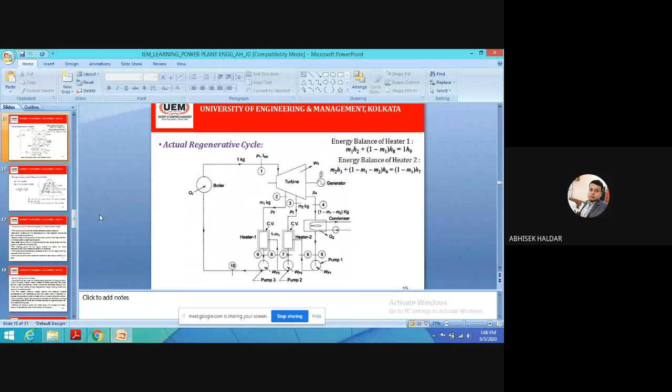There is in place. Okay, so now I will discuss the problems. Prior to that, let me go for it now.

So I will show you. So my slides is properly visible, right? My slide is properly visible, yes sir. Okay, so prior to discussing the problems, let us discuss two more new topics.

The properties of an ideal working fluid in a vapor power cycle. In a steam power plant, the ideal working fluid we use is water, that all of you know. But what should be the ideal properties? Because ideal, yes, it may not be achievable practically, but there are some properties which a fluid should have when it is thought of as the ideal fluid. So what are those properties that a fluid should have?

The first one, the fluid should have high critical temperature and pressure. So whatever fluid I'm using, if it is water or any other type of fluid, the fluid should have high critical temperature and pressure. Now that critical temperature and pressure means the topmost point or the top notch point of the vapor dome. You know what is the vapor dome. The top notch point is the critical point. So that critical point, the corresponding temperature and pressure should be high enough, so that the boiler pressure and the condenser pressure can be controlled.

Next is the saturation pressure at the temperature of heat rejection. The saturation pressure at the temperature of heat rejection should be above atmospheric pressure. Try to understand, saturation pressure at the temperature of heat rejection, that means heat rejection temperature is T2, and on which part does it happen? It happens at the condenser, because in the condenser we reject the heat.

So saturation pressure, because it is a phase change, as in the condenser we are having the phase change. What is happening there? Only the latent heat from the steam is given out, and that means that is the heat rejection. The latent heat rejection is basically happening over there.

So whatever condenser pressure we are talking about, that condenser pressure should be above atmospheric pressure. But I should mention that practically there are very few fluids where we can get the saturation pressure at the heat rejection which is above atmospheric pressure.

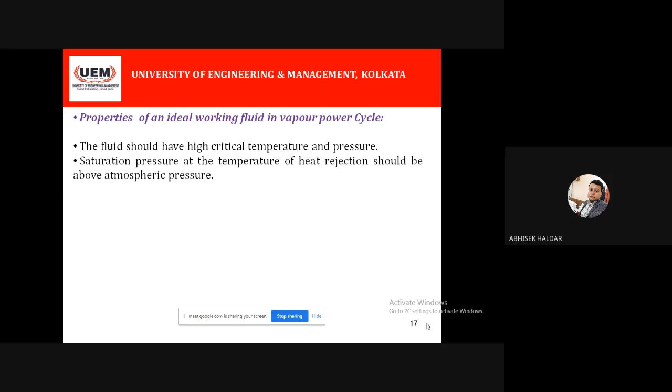Saturation pressure at the temperature of heat rejection, that is at the condenser, should be above atmospheric pressure. If it is so, we don't need to maintain that vacuum. But practically we have to maintain the vacuum as we are not having that type of fluid.

Next is the specific heat. Specific heat of the liquid should be small, so that little heat transfer will be required to reach boiling point. I'm discussing one by one points, otherwise it will be very difficult for me to understand where you are having the doubt. Is it clear? First two points are clear? Yes, sir.

The third one should be also clear. If you know what do you mean by specific heat, the third point should also be clear. Specific heat of the liquid should be small. That means what? Specific heat means the property by which it can retain the heat, any material which can retain the heat. So specific heat of the liquid should be small, so that little heat transfer will be required to reach the boiling point. Consider the case of boiler.

We are heating the water to make the steam. So if the specific heat of the liquid, that means the working fluid, is high, then what will happen? It will not take and will not reject heat much. Whatever heat it is having, that particular fluid will try to retain that heat. That means very less tendency of heat transfer will be there. Heat capacity and heat transfer are different things. We need high heat transfer capacity. So we should have a working fluid with low specific heat, to reach easily the boiling point, to generate the steam or vapor.

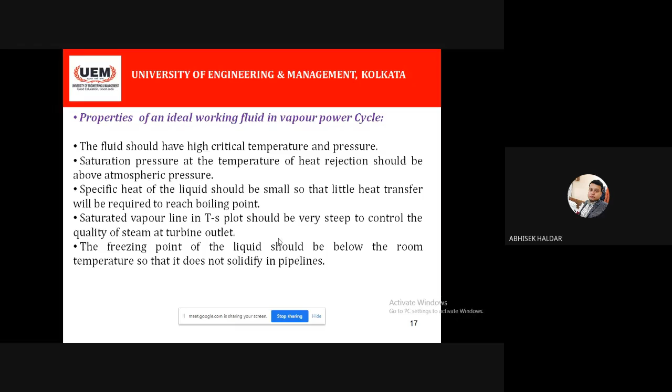So the freezing point of the liquid should be below room temperature, meaning the standard atmospheric temperature. It should be designed in such a fashion that it will not solidify, which happens when the freezing point is much below. So this point is important for cold weather countries. It may not be much applicable for India, but you should remember this point.

Next, the fluid should be chemically stable so that it will not react with the materials of construction, because that is very obvious.

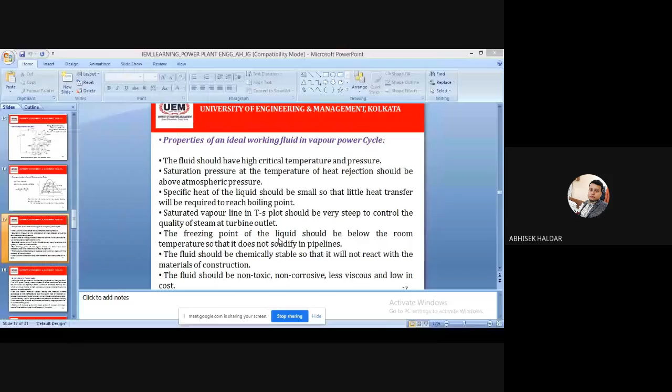Someone is entering now after 15 minutes of the class. Okay.

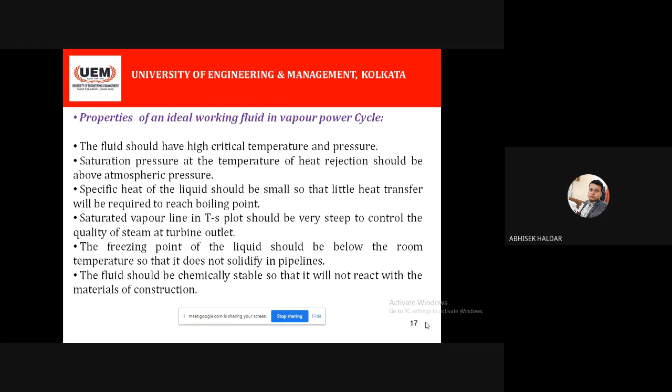So this point we are discussing, the fluid should be chemically stable. That means it should not react with any parts of the pipelines, valves, or whatever metallic parts we have in the construction. It should not react with that. Okay, that's it, that is the chemical stability that is required.

And the last one is the fluid should be non-toxic, non-corrosive, less viscous, and low in cost. Obviously, cost is an important parameter. You may attain these properties for a particular fluid, but if the cost is very high, then the production cost of electricity will be very high. You cannot sell that, right?

So that's why we usually use water, generally, yes. But actually water does not have all these properties, but water is nearly abundant from the point of view of availability, and it maintains some of the properties. Obviously it is not practically possible to get all these properties for a particular working fluid. By using a single fluid, practically it is not possible to attain all these points, but these are some ideal points.

But why do we use water? Water maintains most of these properties, and obviously it is free. We only have to treat our water a bit and we can directly use it. We need not buy the water in most cases, and that's why water is the most commonly used fluid in the thermal power plant.

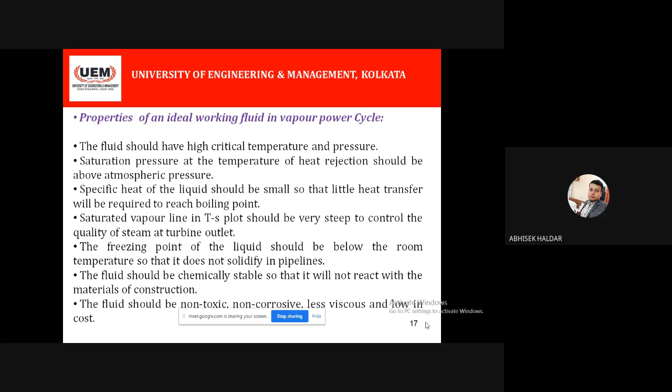Okay, fine. But as I told, no single fluid can maintain all these properties, or no single fluid is available to us to maintain all these properties. There is a need of binary vapor power cycle. Have you heard this term earlier? Binary vapor power cycle - how many of you heard?

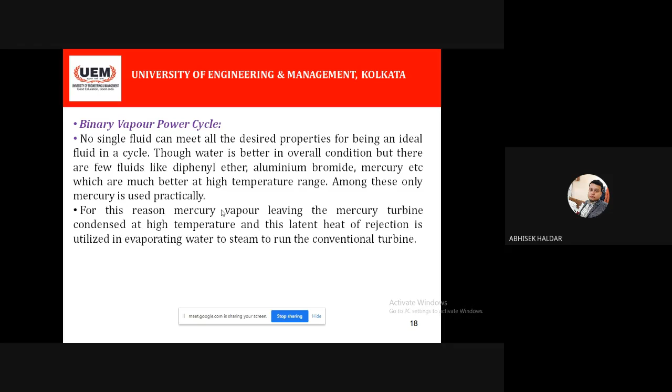So for this reason, mercury vapor leaves the mercury turbine. You may not understand this point first, but still read this second point, then I'm showing you that mercury's viscosity is very high.

I understand that, but I am not using mercury for the whole cycle. I'm using two different cycles - the mercury cycle will be separate, and the steam cycle will be also there. Both cycles will be there.

At very high temperature, mercury's viscosity will decrease - that is also correct. The effect of temperature on viscosity will also work. It will be high if you compare with water, but not that much high. When we use high temperature, the viscosity will decrease.

Pumping power, if you compare with water, will obviously be higher in the case of mercury. But if you calculate the total work done, that will obviously be much more higher. I will come to the TS plot, then it will be more clear.

So for this reason, mercury vapor leaving the mercury turbine condenses at high temperature, and its latent heat of rejection is utilized in evaporating water into steam to run the conventional turbine. This means a conventional steam turbine and a mercury vapor turbine - two separate cycles will be there.

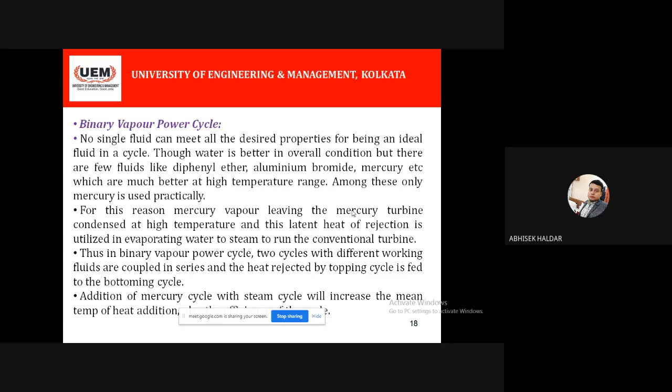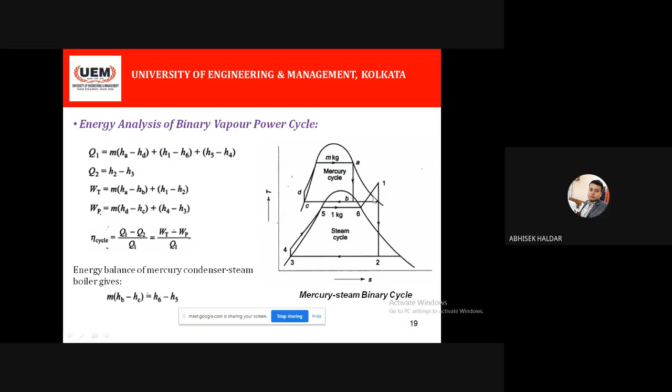Now it may so happen that in the problem it is mentioned which part is utilized - this heat rejected by the condenser of the mercury cycle is utilized on which part. If it is written for the whole heating, that is required - that is not the case. But if it says except superheating, if that is mentioned, that means from H4 to H6, that will be your HB minus HC.

Now that will depend, you have to read the problem properly - what condition is given. If nothing is given, no condition is given, then this is the ideal case, whatever I have shown - that only HB minus HC multiplied by M is utilized for the phase change only. That is the ideal case. Okay, so...

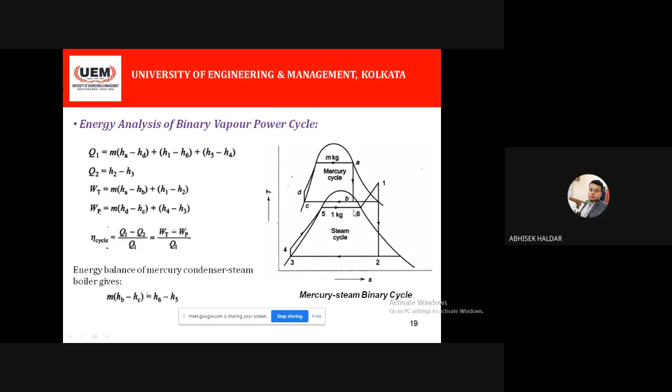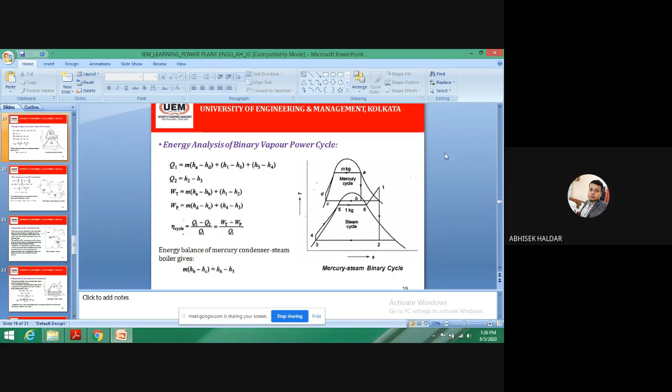So you see, this coupled cycle, I'll show in the next class. But prior to that, whatever so many things we have discussed, we have to discuss some problems also, isn't it? Have you seen any problems from the reheat or regenerative cycle? No, sir. Okay, so let us...

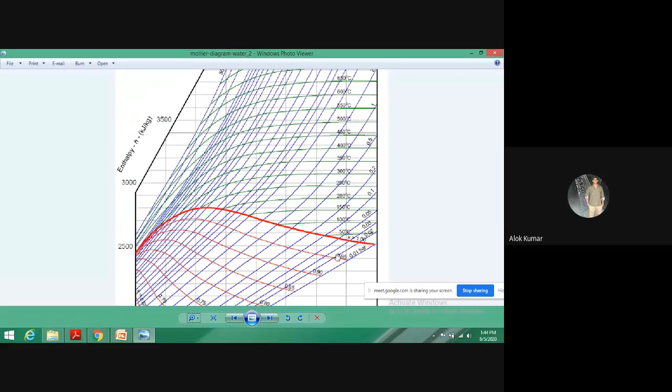So sir, how will I get the pressure? The pressure will be reduced, obviously less, because in the condenser vacuum is maintained, below 1 atmospheric pressure. I'm just giving an example of how to locate that point.

How to locate that point: if you know only the condenser pressure, from point 1 that you have tracked, use your scale and drop down a line up to that corresponding pressure, and stop where it intersects that pressure line. That is your condenser entry point. This is how you have to find it out.

For the reheat also, the same concept is used. You have to see the corresponding pressure and temperature, and find out the corresponding point. Once you find the point, say for example this point, I can find out the enthalpy at this point.

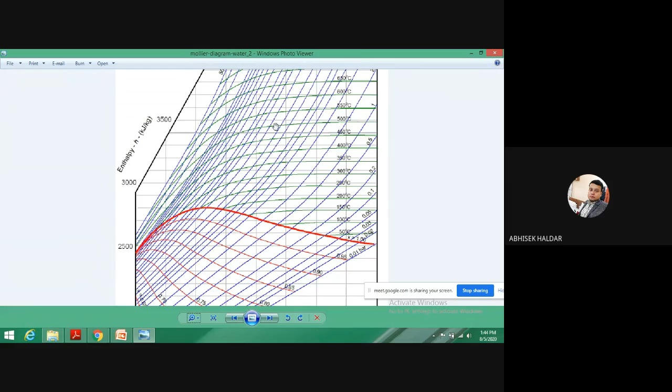From this point I'll go to the left, place my scale, and for say 550 degrees Celsius, I'll get the value of enthalpy. Here the graduation isn't given properly, but in the Mollier diagram in your book, you will find proper graduation and get the enthalpy value from the y-axis.

You will get the value of entropy from the x-axis. Just use your scale - from that point go left to get enthalpy, then go downward and locate that point on the x-axis to get the specific entropy. Is it clear how to find h and s values for a particular point?

Yes sir, thank you sir. This is the basic idea you should have. That's why I took 5 minutes over this, because unless you know this, even if you know how to use the steam table for a particular pressure and temperature, it won't help.

Sir, what does this red line signify - this thick red line? The thick red line is your vapor dome, that means the saturated vapor line.

And the thinner red lines are for the dryness fractions - constant dryness fraction lines. See here it's written 0.95, that's the dryness fraction, then 0.9, 0.85, gradually reducing. Obviously if we go left, the dryness fraction will reduce.

As per your diagram, you have to locate it - it may be dotted. In some books I've seen dotted lines used. Some identity will be there, either color or different line types, to segregate the different types of lines - constant temperature lines, constant pressure lines, and constant dryness fraction lines. These three things you have to identify.

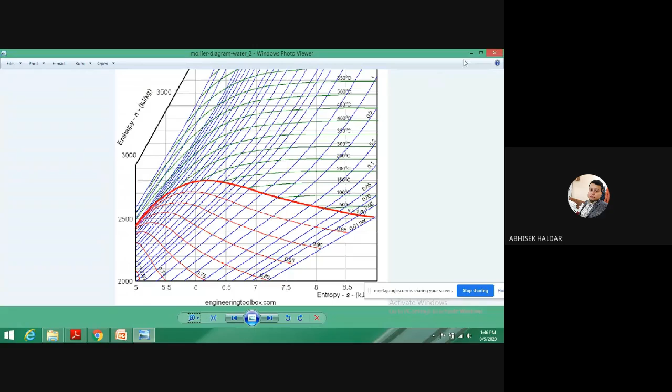Okay, so let us now see some problems. Time is there, I think I should discuss at least two problems. Can you see this 12.3 problem in this PDF?

Yes sir. Okay, so read this problem, it's from your book, or whatever book you are having. If your concept is clear, you can find out all these enthalpies, so that you can calculate the efficiency and all other parameters.

Read the problem: a cyclic steam power plant is to be designed for a steam temperature at the turbine inlet - only temperature is given, 360 degrees Celsius, at this point. Exhaust pressure of 0.08 bar. Exhaust pressure means which pressure?

Sir, inlet at the condenser. Yes, that means the condenser pressure - throughout the condenser, the pressure is the turbine exhaust pressure. The turbine exhaust pressure, or your condenser pressure, the exhaust pressure of the cycle, means obviously the condenser pressure. That is 0.08 bar. Are you asking about 0.02 bar? It is 0.08 bar now, where high vacuum is maintained.

After isentropic expansion in the steam turbine, the moisture content at the turbine exhaust is not to exceed 15%. That means what is the value of your dryness fraction? 0.85, 85%. That is the quality of steam, or the dryness fraction, that should be maintained at 0.85.

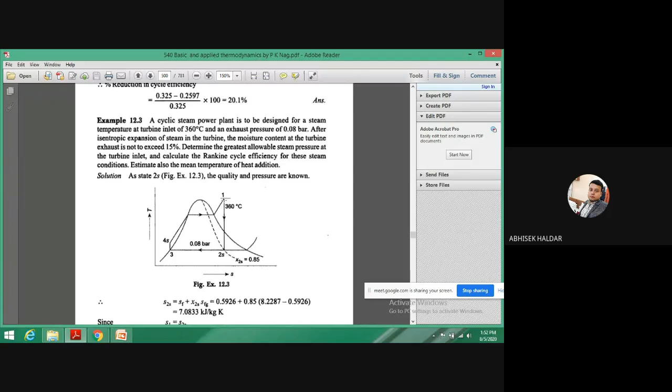Without calculating a single value, you can easily track the boiler pressure that is needed - that is the steam pressure at the turbine inlet, or the boiler pressure you should say. So just using the Mollier diagram, if you know how to locate points at different pressure, temperature and so on, you can say the value without calculating, right? So that is one trick, but let me see how they have calculated it.

S to S, okay, you see they have used the steam table, that is very clear. In the first step, the well known equation s2s means at this point, to S point, what is there? Pressure is given. So at that particular pressure, this is a saturation pressure, right? So go for the steam table.

So the first method that I told, that is a separate method, and this method whatever they have calculated, that is a separate method. That is your choice on which method you will go.

Now this S to S, you see, your SF means this point is the SF, and this SFG you can get, this SF and SFG will get from the steam table. How you will get? At this 0.08 bar pressure, if you find out the saturated pressure table in the steam table, you will find out this SF and SFG value.

x2s value is given in the problem, so you can easily calculate the value of this S to S. Now this S to S value, you will get easily from the Mollier diagram also. So that is up to you.

Now S1 is equal to S to S, that is very obvious. I will consider this as an ideal Rankine cycle. So S1 should be equal to the S to S value. So S1 is this one.

Now what they have written as state 1, the temperature and entropy is known. Temperature is known to you, that is given in the problem. At this temperature, the Sg value they have calculated, they have got this value from the steam table. At this 360 degrees Celsius, the value of Sg you will get from the saturated steam table.

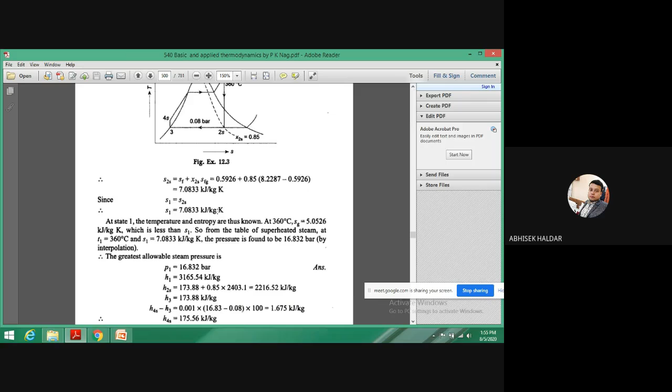Now the greatest allowable pressure is P1, this one. Once you are getting the P1, now P1 and T1 you know, T1 is 360 degrees Celsius, so you can calculate the value of H1. Now this H1 also you can calculate from the Mollier diagram.

H2S they have calculated using the formula, like entropy, here the H2S equation will be H suffix F plus X2S into H suffix Fg. So using that value, all these values you have to find out from the steam table, and you can calculate the H2S value. H3 value similarly you can get from the steam table.

H3 value, because this H3 value is nothing but at 0.08 bar, it is the value of HF, is it not? Tell me, is this clear? H3 value, yes. It's HF, 173.88. Here also 173.88. Now, so this is the same thing, this point, that means it is your HF, saturated liquid. So H3 you are getting.

Now all the parameters, all the H that you require for calculating the efficiency, I have shown you several times in the slides. All those things you have to calculate for the corresponding Rankine cycle. Separately you have to calculate Q1. Once you are getting these enthalpy values, 4 enthalpies, you will easily calculate WT, WP and all those. I think they have done that. Yes, WT is H1 minus H2S, simple calculation. WP is also there.

Okay, this WP is H4S minus H3. Now I have discussed earlier how to calculate this pump work, in the first class. This pump work, first or second class.

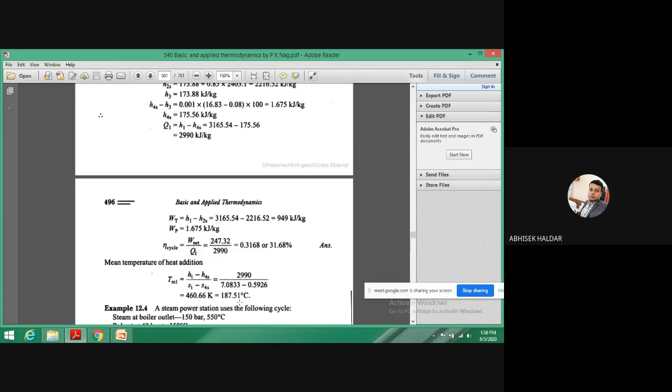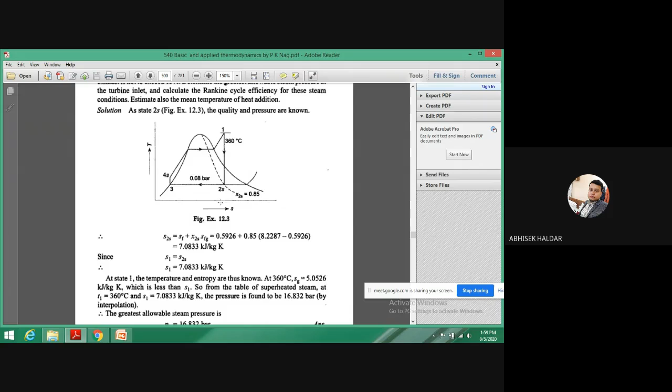Okay, so is there any doubt about this problem? The interpolation part, or whatever I have shown you through the Mollier diagram, you can skip those difficulties over here and directly get the values. I will suggest you check by calculating, by taking the values from the Mollier diagram, solve the problem, and check whether it comes nearly the same or not. Is that clear to all of you?

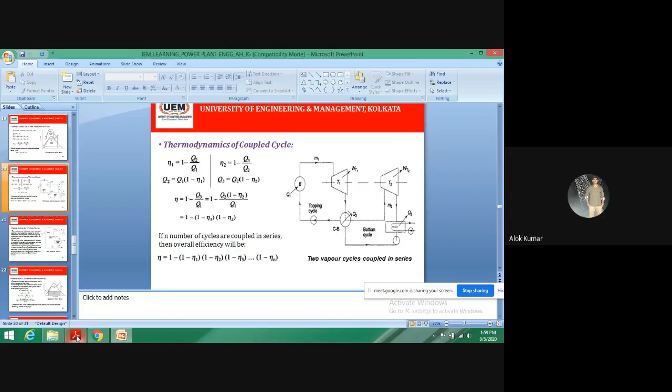Okay, so practice this type of problem. In the next class I will discuss more problems, some reheat problem and regenerative problem.